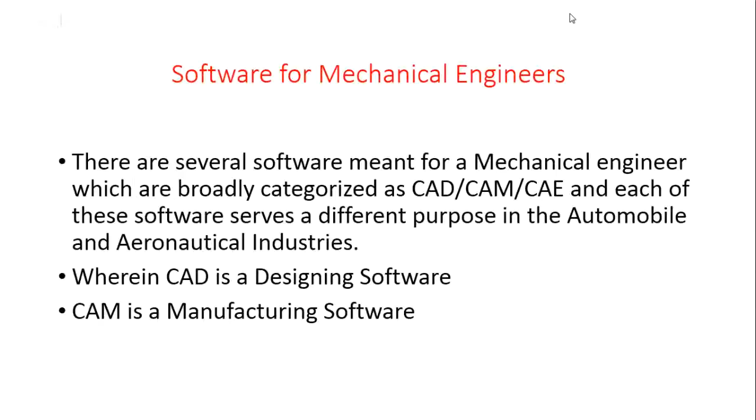They developed software for drafting, then for designing, then for manufacturing, and then integrated it with their sales, as well as with their services. As you know, service of anything is also very important.

The aeroplanes in which we travel need servicing certification also, and they require servicing from time to time, because their service certificates are valid only for 1 year or a flying time of 10,000 hours. After that they have to undergo a rigorous inspection, and anything not suitable to the standards, or that has deteriorated or lived its life, has to be replaced or maintained as per the standards.

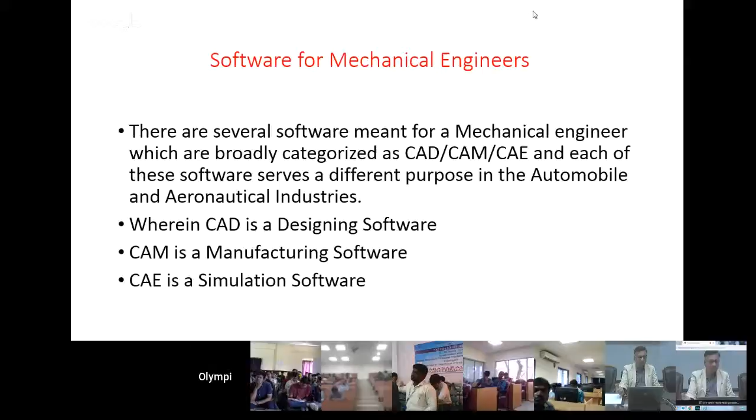So CAD, you may be knowing, is only for design and drafting. That is the thing. So for drafting we have used almost AutoCAD, or some other softwares are also there for that application which are not very popular. Earlier there used to be some other company also, but nowadays AutoCAD is mostly used.

So what is the purpose of the CAD software? It is used for creating designs which have already been seeded in the mind of the designer. It is a medium to communicate the fresh ideas arising in the mind of the designer. This is a typical definition of a CAD software, and also a definition of, we can say, drawings. Drawing is called the language of engineers. So whatever is in your mind, you will keep it in a format.

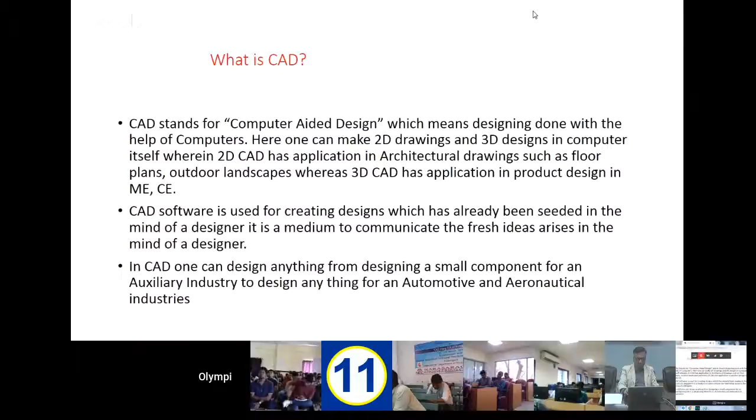This is very much applicable in threads, whether the screw is left-handed or right-handed, like that. So that those confusions are not there, to avoid those confusions, we have conventions. So this is how the CAD softwares are all related to each other.

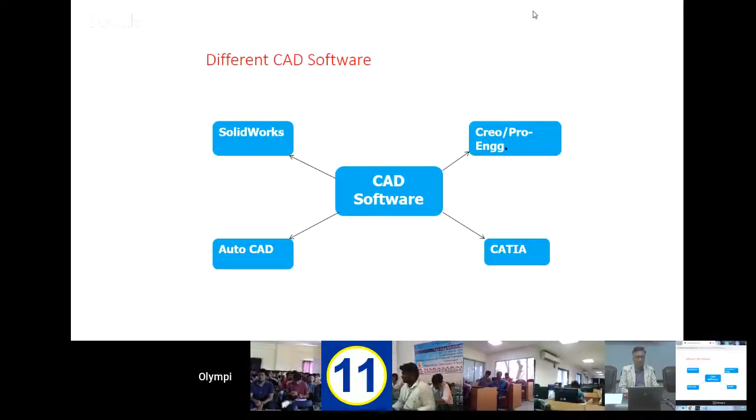As you can see, these are all SolidWorks, Creo, Pro-E which is Pro Engineering, then AutoCAD and CATIA. They are designed for different applications, keeping in mind the various sizes of the softwares which can be handled by general people, or persons whose applications are lighter.

So what is CAM? The full form is Computer Aided Manufacturing. It's a simple term. So how can we manufacture with the help of a computer?

For manufacturing, what we have to give, or what we were doing with the conventional system - in the conventional system, what we do is we give the drawing to the shop floor people, and they manufacture it. What they will see is what is the size of the component.

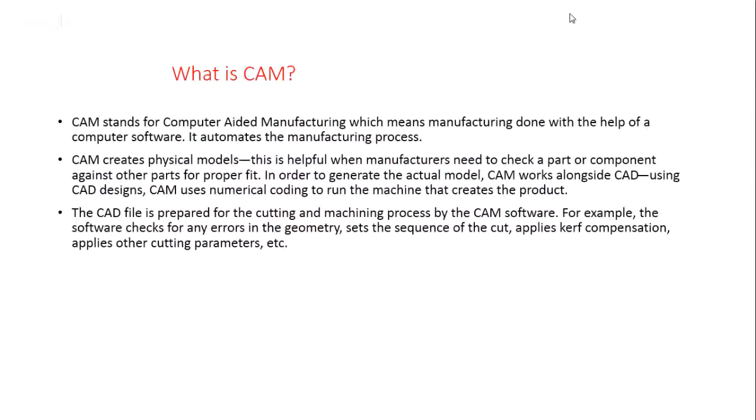Let me give you one example. Suppose our HOD came and we have planned that this course has to be done. He will simply say, you do this course. Now suppose I am not a human being but a machine, I will ask which course? So there will be a course name, say SolidWorks.

Then again I will stop because I am not getting further instructions. What next instruction does he have to give, and what should be the course contents? That means you have to define everything, which chapter is to be taught, and in that chapter what is to be taught. So you define that and I will feed it in, yes this is to be taught. Next I will ask how much time it will take.

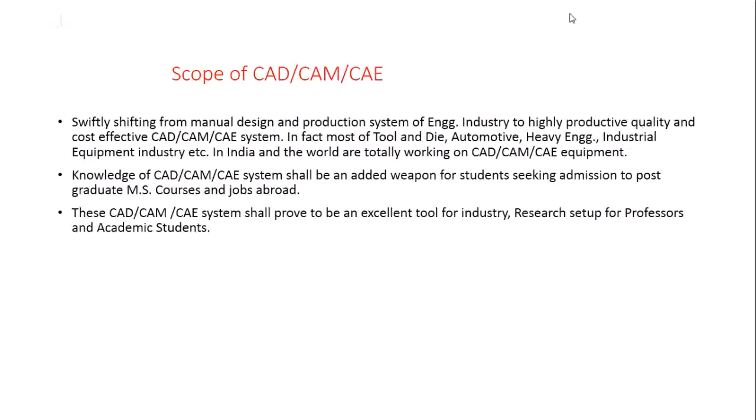And they are sharpened by diamond tools. They have very high hardness also, along with ductility maintained. So those type of things, we see a lot of changes in the products.

So definitely the quality is improving. Quality is just a relative term, we can say, it all depends upon the time at which we are talking. The quality of today was never thought of in the past, say 20 years back. At that time its cost was very, very high for producing that type of quality in that type of product. The example, maybe, your pens.

Earlier we were using fountain pens, and of course they were good quality ones. But if you see it from a handling point of view, or ease of doing the work, that was difficult actually. So we can say in that sense the quality has improved very much, and the cost has become very effective. Nowadays you don't even think about it if you've lost a pen.

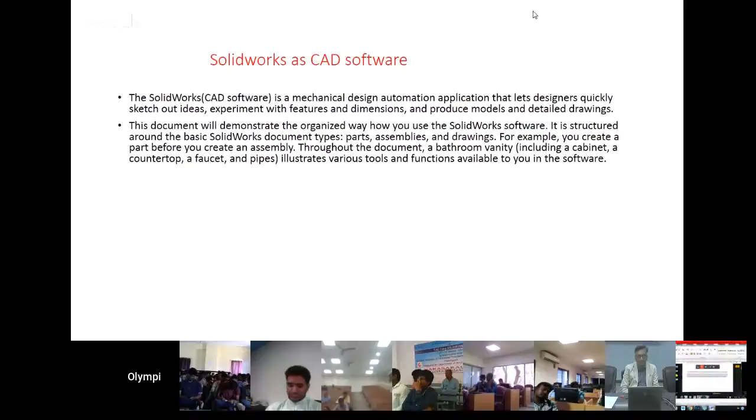In this software we can demonstrate the organized way how you use the SolidWorks software. It is structured around the basic SolidWorks document types like parts, assemblies, and drawings. For example, you can create a part before you can create an assembly, like that. So with various examples, you will see.

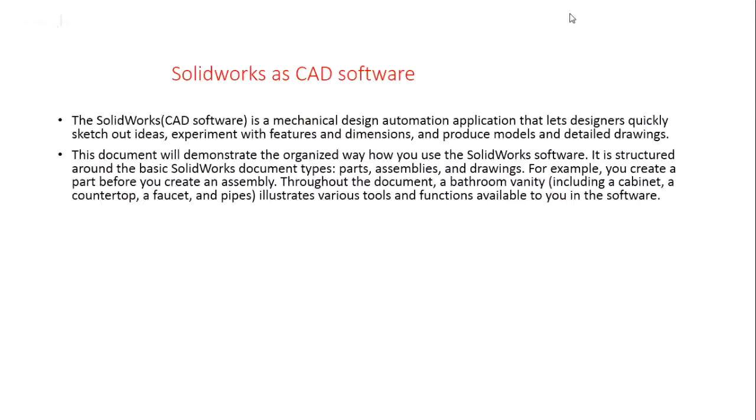I think some time is left, we'll just quickly cover it, what is this, because I'm also a professor, so bad habit of talking too much sometimes on small things also.

What is SolidWorks? It's a design automation software package used to produce parts, assemblies, and drawings. These are some of the terminologies you don't need to bother about now, because as you will see in the software, you will appreciate and better remember it at that time. It's nothing but the same thing which we used to do in paperwork, it's just a computerization of that.

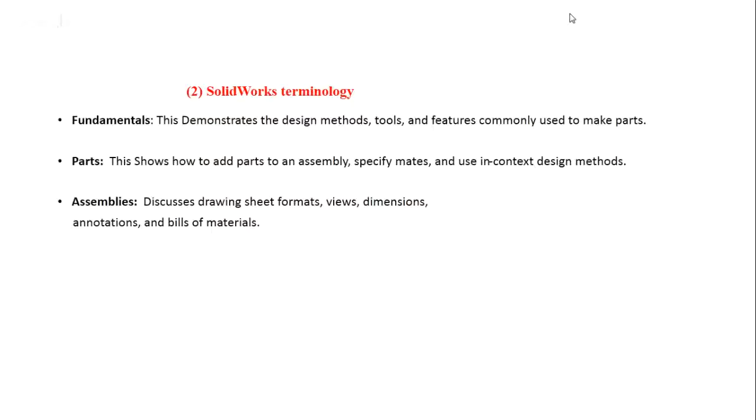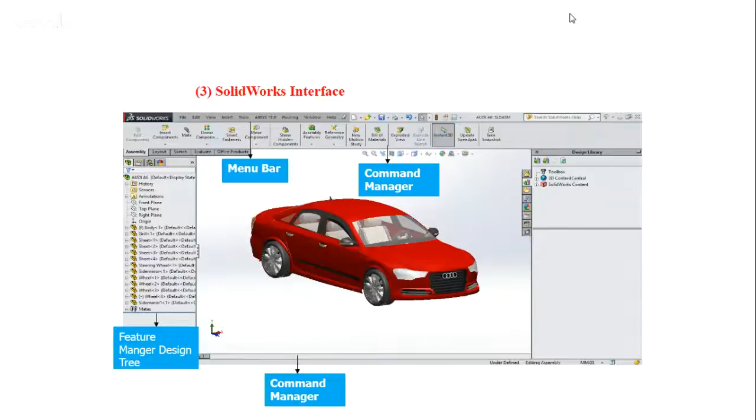So this is how it looks like. It has a menu bar just like any other software, command manager, feature manager design tree, and command manager, where the software will be interacting with you. So this is how starting up looks.

There are various modules if you go through it. You can start from part, and once you have a part, you can go for assembly, and then finally you have a drawing for production purposes. When it's modeling, setting up units and all those things, we'll see in detail. I will just quickly go through it so that it's clear to you what we will be covering.

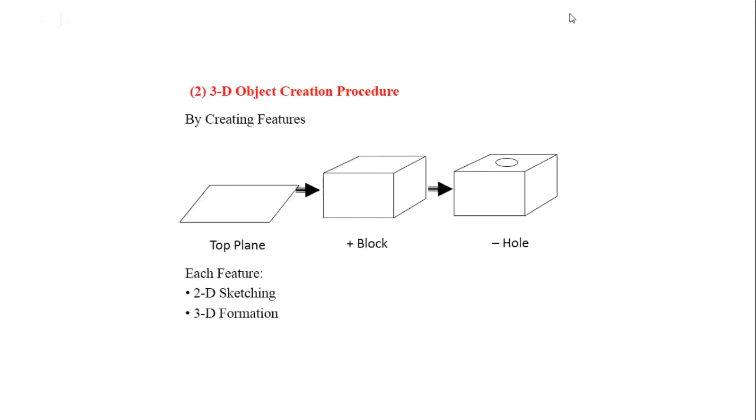This is the 3D object creation process. From a plane you will make a block, and then by subtracting you will have a hole in it. This is 2D sketching, parametric modeling.

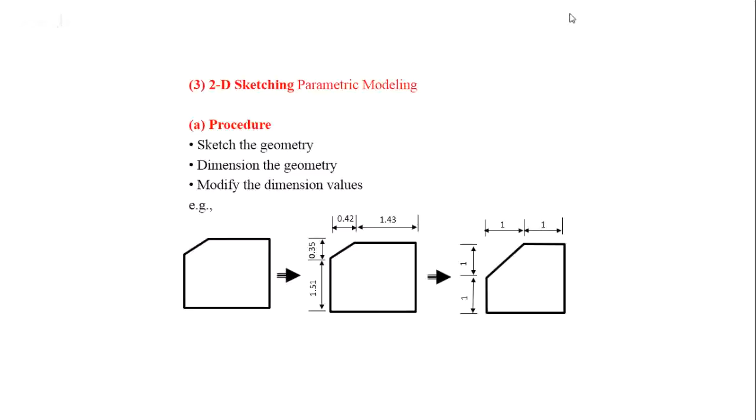These are the basic things, same AutoCAD principles. Anything has to be defined point wise, from point to point. So a line is defined from this point to the next point, or some other point, by the shortest distance. So the shortest distance will always be straight only. This is how the line is defined.

So our software understands it like that, and why we are sharing it with you is that the software will understand it this way only. You cannot define it the way you like. It will always define a line by the shortest distance only, so it will always be straight. Your arc will be defined as a part of a circle, which will have some center and some radius or diameter. And then you have a tangent arc also.

Which is tangent to maybe some line, an arc which is tangent to some line or some other body, or some other circle also, it can be. We will see whether it can be tangent to a spherical object also. Then we have a 3-point arc, which by definition will pass through those three points.

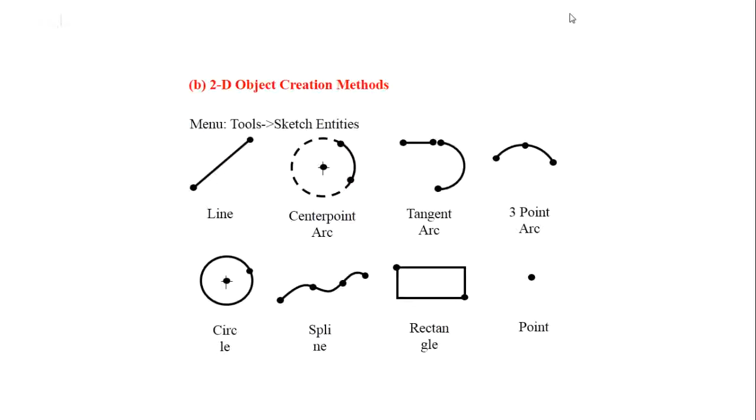It is not defined that it will have this curvature, or the radius—it's part of that circle. Then we have a circle, and by definition a circle should have a center point and a radius or diameter. A spline is maybe just a combination of arcs passing through some definite points. A rectangle is defined as having two straight lines parallel to each other and two perpendicular lines, with the area capped by the rectangle. Like that, we have to go by standard definitions, so that everybody understands the same thing.

This is all the commands: mirror, fillet, chamfer, offset entities, trim, extend. You must have done this in AutoCAD also, but there may be slight differences in how to do it.

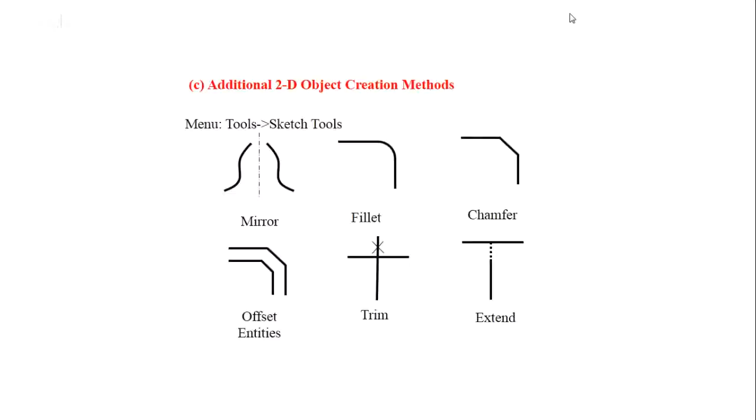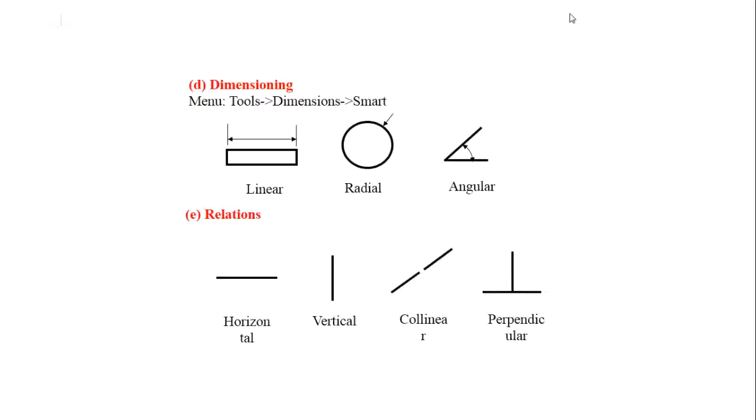Then you have dimensioning—linear, radial, angular, type of things. Then with respect to relations also: horizontal, vertical, collinear, perpendicular, parallel, tangent, midpoint, coincident, concentric, symmetric, equal. Whatever type of relationship you can think of, it's all there in the software.

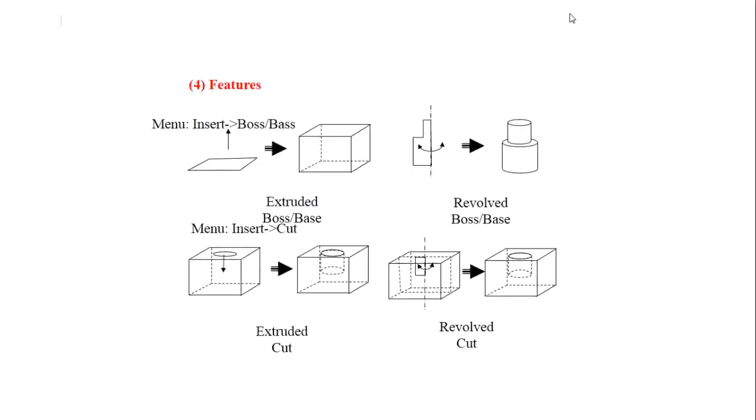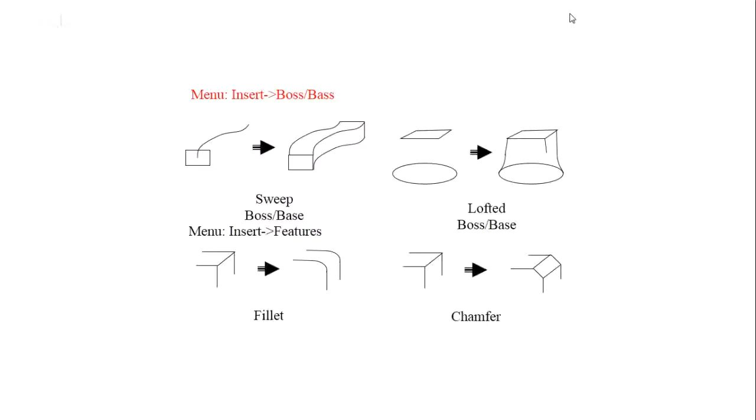Then you have features. What is this? This is extrude and revolve. Then sweep and loft—this is how you create 3D from 2D. Then fillet and chamfers are there. And then pattern and mirror—linear pattern, circular pattern, and mirroring, that type of thing.

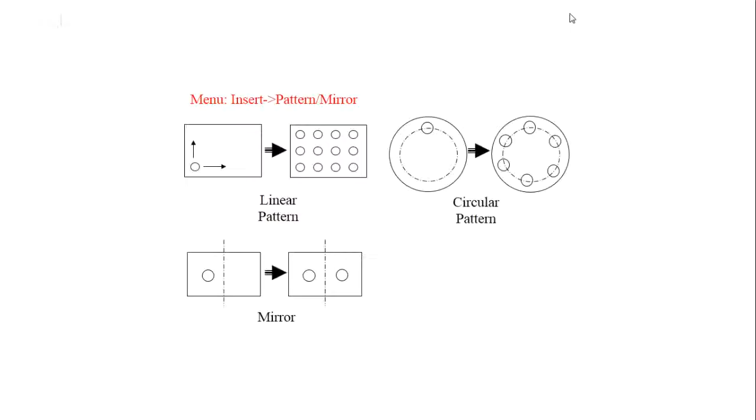Then you have reference geometry, with respect to either a plane, a certain axis, or a certain coordinate system—what we are talking of as 0,0 and all that. Some data has to be there.

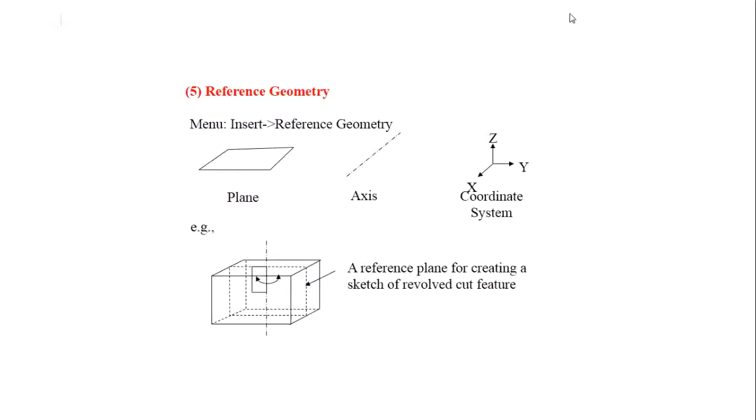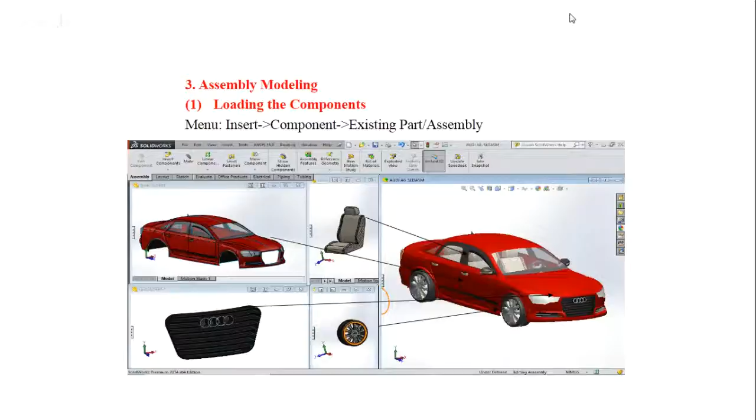Then you have loading the components. Again the backrest has come in this seat design we are talking of. This whole assembly, when we show you, will be more interesting—this is only a pictorial representation. So defining mates is again about putting constraints. This is an exploded view or the assembled view you can have.

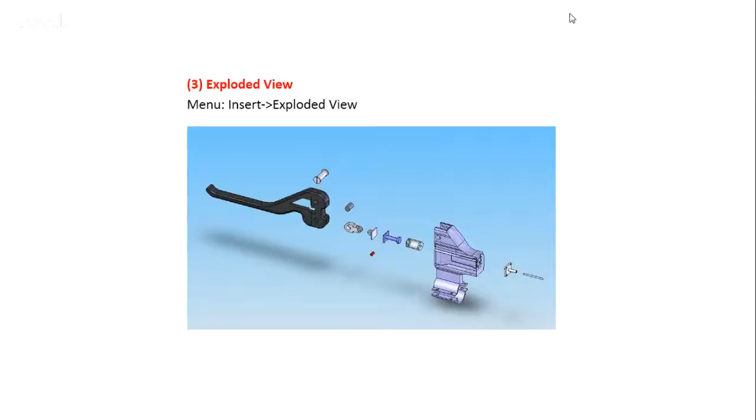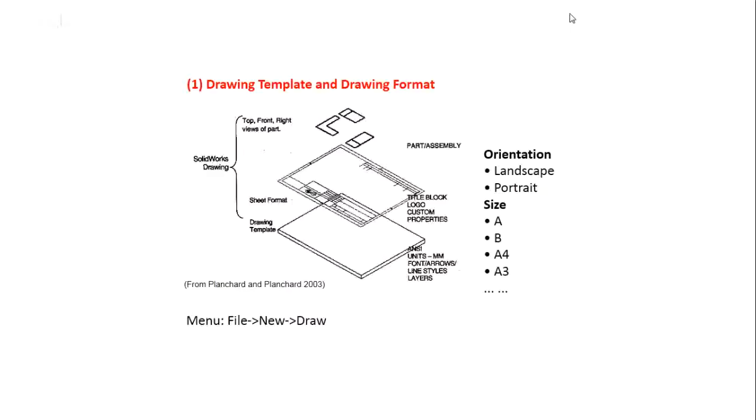This is a 2D drawing of a part assembly. You will have a drawing template and drawing formats—size, orientation, what type of things, all those things. Then you have a drawing view—top view, front view, right view. This is all settings with respect to the drawings only.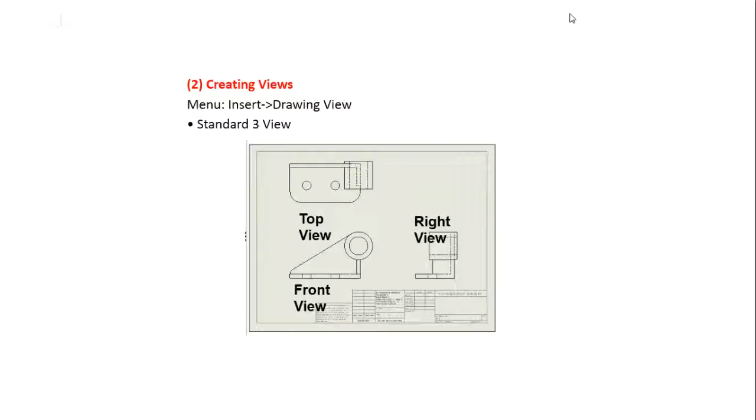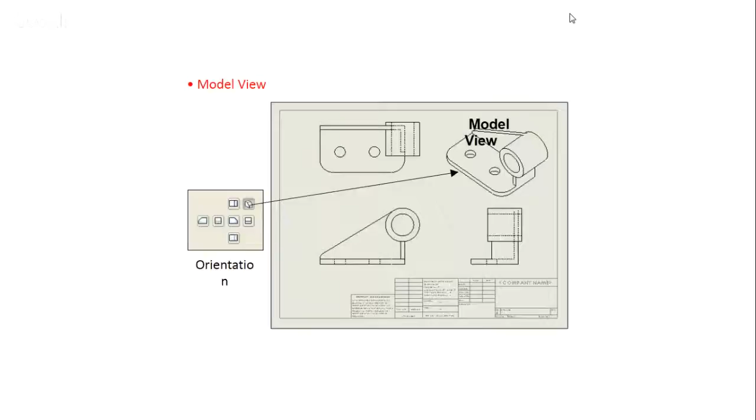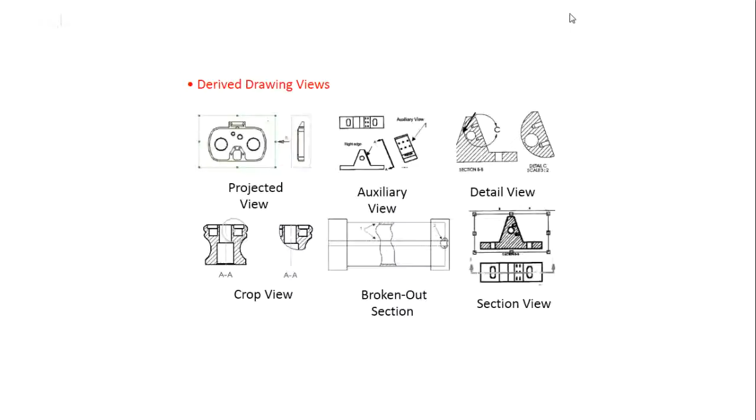Then you have a model view also—orientation, what type of orientation you want to fix. We have derived drawing views, projected views, auxiliary views, detail views—whatever we have done in drafting is almost all covered. Nothing new, but just to remind you of these things, since sometimes when we don't use them frequently, we forget.

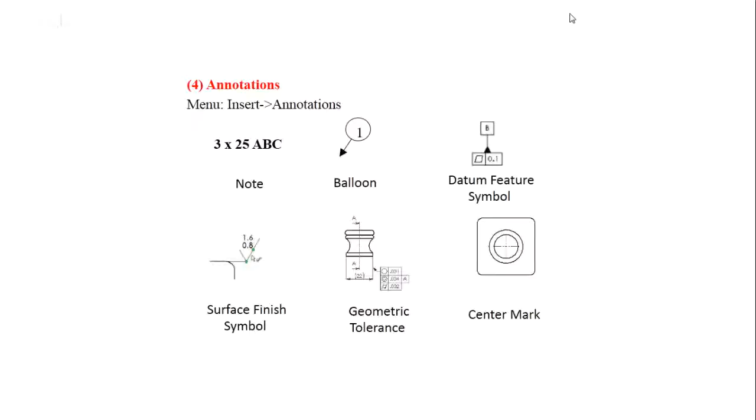So this is all about dimensions—all type of things are there. Annotations are also there in dimensioning. Bill of materials is there too.

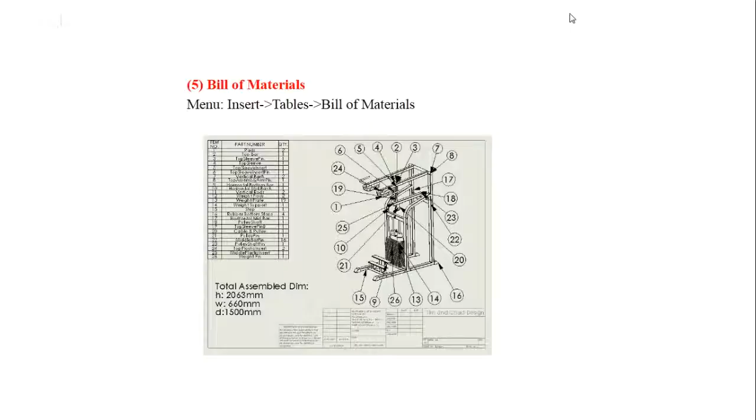We have covered this much, and there are more features which we have not covered. Of course, everything cannot be covered intentionally. I have done some major things so that you have an idea of what we are talking of, what you are going to have in the week's program.

If you practice it, as Dhami Sahab has said, then it will be easier for you. Otherwise, we will have a demo type of thing done here so you can appreciate that these things are possible in SolidWorks. Later on, you can practice it as and when you find the time.